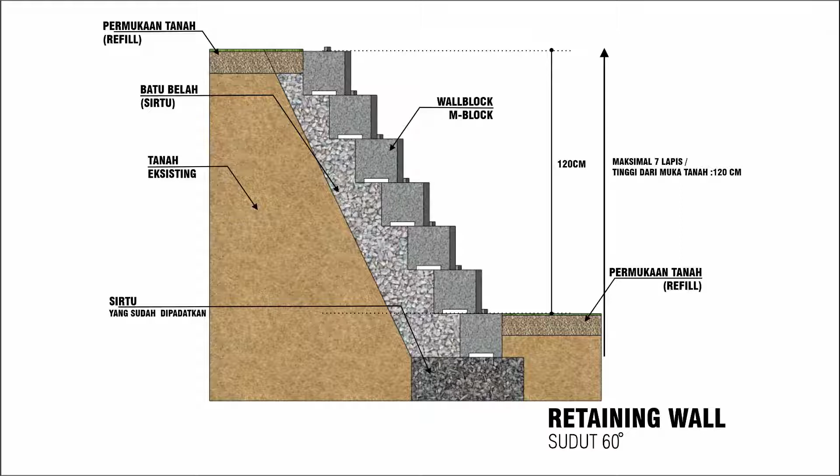In this video I'm going to show you how to build a retaining wall. I'm going to show you how to go from this to something that looks like this, what you see directly behind me here. Alright, let's go ahead and get started.

Alright, so the first stage in building a retaining wall is to design and plan the wall. What I have right here is a diagram of the side of the wall if you're going to build a 3-foot retaining wall like I'm going to show you how to do in this video. Depending on the height of your wall, your design is going to vary a little bit, but this is basically the fundamental elements of most retaining walls.

So first off, you have a 6-inch layer of packed gravel base. That's like a type 2 gravel, the same stuff you'd use underneath a paver patio to make sure it stays flat. This is going to be the foundation. This is what's going to keep the blocks in place and keep them from waving around and warping and keep your wall from pushing over. So extremely important. You don't want to skimp here because that's the structure of your wall.

So you've got a 6-inch gravel base, and then you've got the blocks. This type of block has a little bit of a lip here, and that's the type of block that I recommend. They're really widely available, they're easy to use, and they're pretty cheap.

Then behind the blocks you have a 6-inch layer of gravel for drainage. That's like a rough 3/4 inch rock. You can ask your local rock yard, wherever you're going to get the gravel base and the drain gravel from, what they recommend for cheap drain gravel for behind a retaining wall. It's usually going to be about a 3/4 inch rough rock that you put back there.

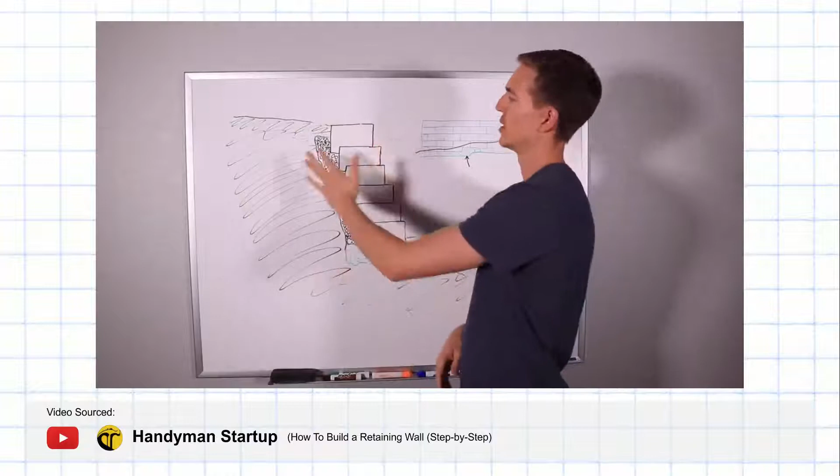And that's important because when it rains and all this dirt soaks up a bunch of moisture, it needs somewhere for that water to go. It's already under a tremendous amount of pressure just from the dirt. So we get all that water in there, it gives us even more pressure, and then it's going to push our wall over. So we need a place for that water to go, so it can go down through these rocks and out the front of the wall.

Now in some cases, you're also going to need a drain pipe down at the bottom here if you have a really tall wall or your paver blocks don't allow for water to go out the front. So basically check with your block supplier and they'll give you recommendations on this. It's a very excellent resource to help you through this project, so make sure to utilize that.

And then up here at the top we have our topsoil covering over our gravel, so we can plant grass or plants or whatever on top of that. And then back here, this is all packed dirt. As you build the wall, you're going to want to pack it down and tamp it down to make sure it stays in place and doesn't sink down and your wall doesn't start caving in backwards. You don't want that.

And then in the front, you need to cover half of the bottom block. This is your ground level right here, and that needs to go up to at least half of the bottom block. This is a 6-inch tall block, and this is a 6-inch paver base. We're going halfway up the block, so we need to dig the hole at least 9 inches deep for this wall to be structurally sound so it doesn't move forward. Wherever the ground level is going to be once you install your wall, you're going to have to dig at least 9 inches deeper than that if you're going with the same system I'm showing you here.

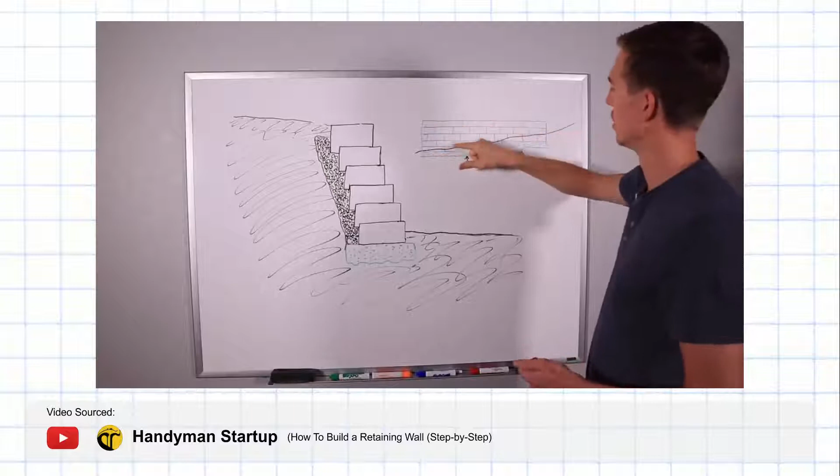Now over here on the right, I have the front view of a wall if you're building a wall up a hill. Now you might have the question of, well, what do I do if I'm going up a slight grade? Should I just angle the blocks and go up at an angle like that?

And the answer is definitely no. You need to have a perfectly level block. That's very important for the structural soundness of the wall. It needs to be structurally sound. So what you'll do instead is you're just going to step it up. You can just step it up so you don't have to dig 4 feet deep over here. You can still just dig down the 9 or 12 inches or wherever you're going and then just step up the bottom as you go and make sure it's just really packed and level, and that's the most important thing.

Alright, so let's talk about a few things you're going to want to consider when you're designing your wall. The first thing is going to be the maximum height. At the tallest point of your wall, how tall is it going to be? That's important because it's going to determine the design here. It's going to determine what size blocks you're going to use, what kind of drainage you need, and the thickness of the base that you need to install. So you're going to want to consider that height.

Secondly, you're going to want to consider, again, what kind of blocks you're going to use. There's all kinds of different blocks. These are the ones I like just because they're really simple and they're cheap and they look really good still.

And then you also want to consider the dirt. You're going to be moving a lot of dirt, so you're going to want to think through where that dirt is going to come from. You're going to have to dig down 9 inches deep here, and you're going to have to do something with that dirt. Where are you going to put it? Are you going to put it back up on the top of the wall? Do you need to bring in more dirt to put up on top of the wall? So you really want to think through that and plan it and kind of eyeball it if you can, or actually do some calculations if you have the time, because the last thing you're going to want to do is move more dirt than necessary.

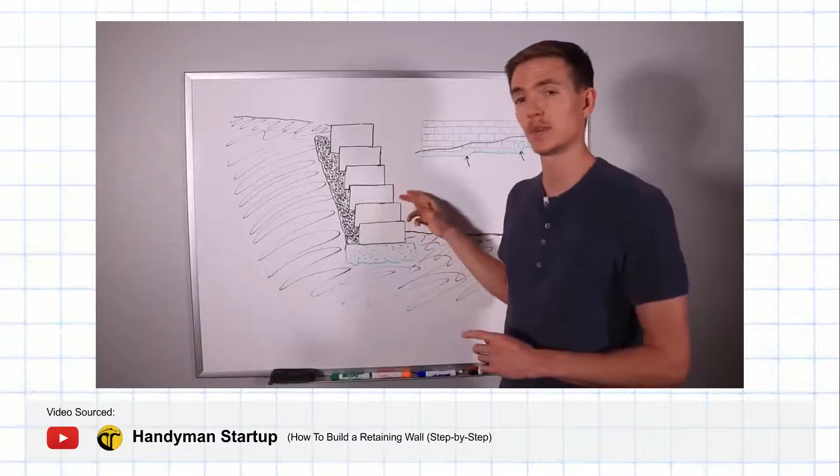And the last thing you want to consider is make sure to check your local codes, so you build your wall to code, because you're not going to want to have to redo this. And lastly, your utilities. Make sure there's no utility lines running under here that you're going to hit when you're digging, and make sure to call before you dig. And once you've got it all planned out, you can go ahead and start digging.

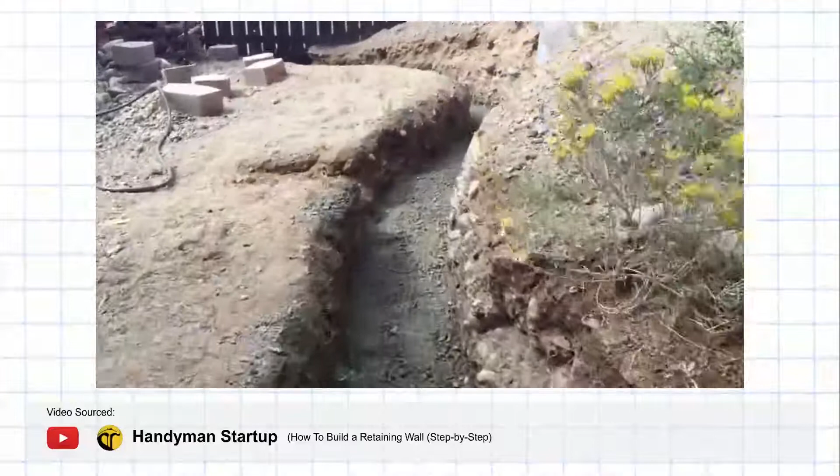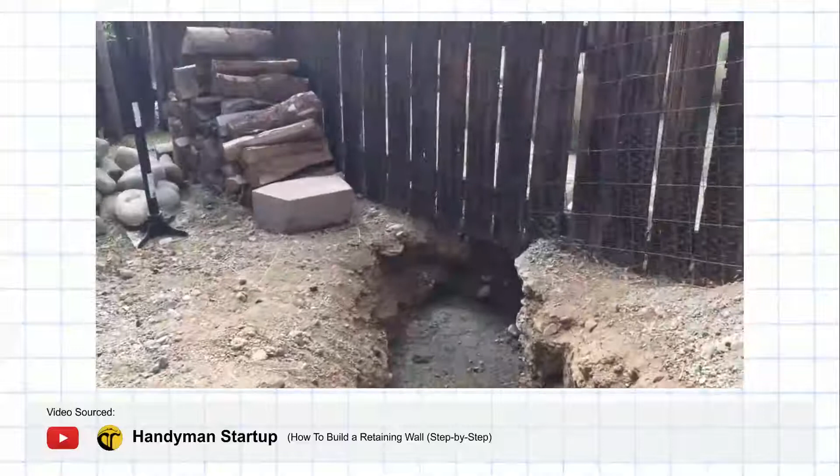Now, I'm not going to show you how to dig because that would be boring and you already know how to do that. But here's a quick look at what your trench might look like when it's finished. You want to aim for a really level trench. You want to make sure it's level before you add the gravel base. This is going to take a lot of work. This is probably the majority of the work, especially if you have rocky soil like I do here.

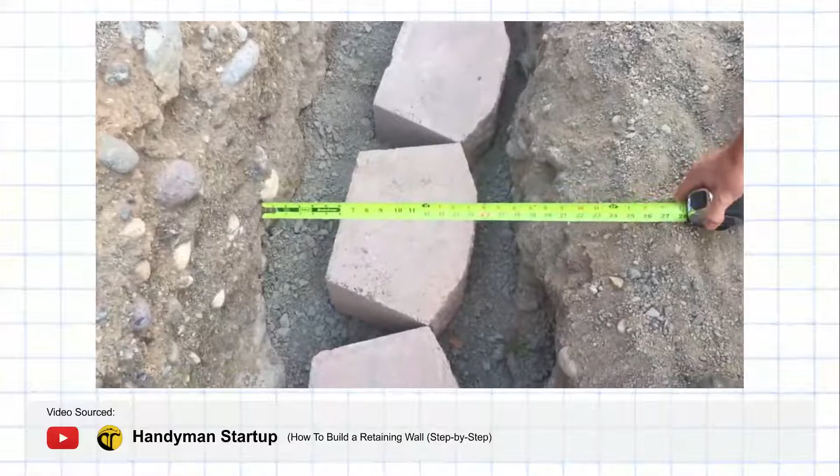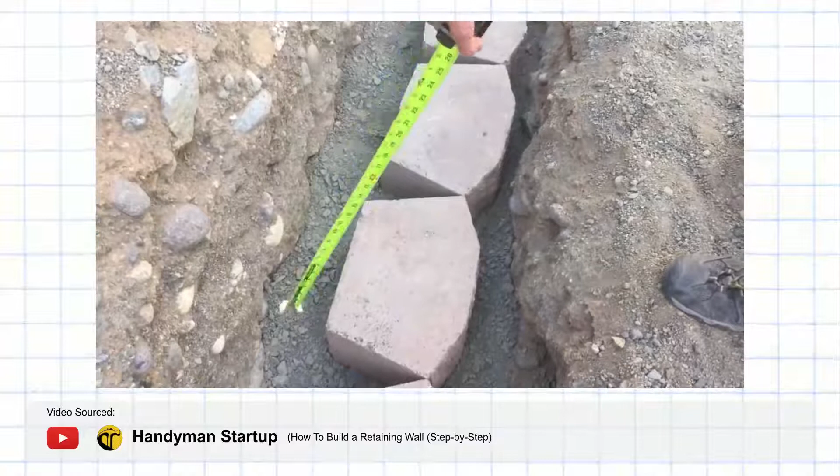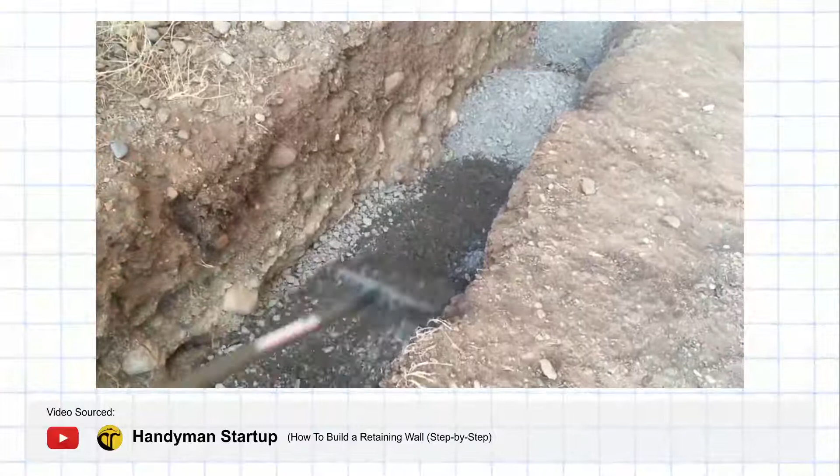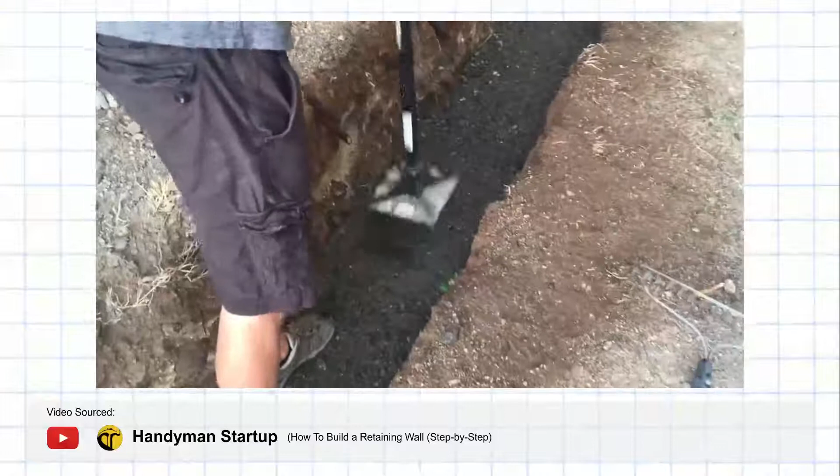And once you've dug your trench, the next step is to add the gravel base. You're going to want to do this in 2-inch layers. So add about 2 inches, dump consistent piles and then rake it out into about a 2-inch layer, and then tamp each layer really well. You really want to pack it down. And if you need some extra moisture, if it dries out, go ahead and get out a hose and get it slightly damp to help it pack down a little bit better.

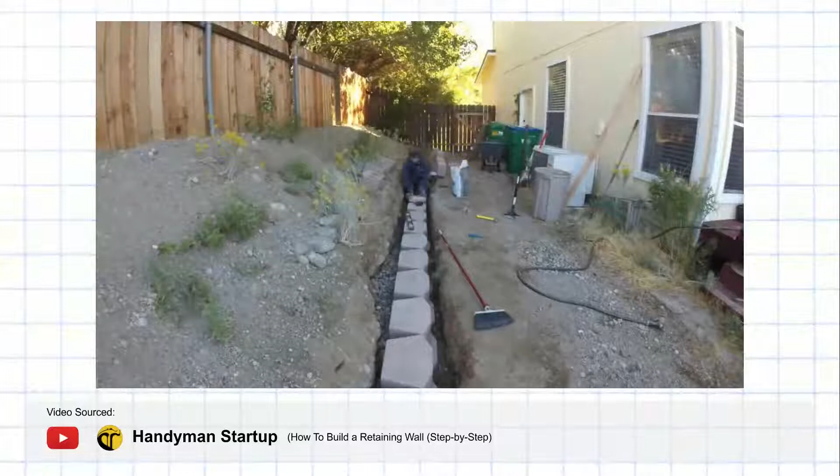And once you've built up 6 inches of gravel base, go ahead and level it out really well and then tamp it down one last time to prepare for your first level of blocks. And finally, you can start on the first layer of retaining wall blocks and start actually building your wall.

So start at one side and just work your way down one block at a time, leveling each one as you go. So the first layer that you're going to lay down of these pavers, or these retaining wall blocks, is going to be the most time consuming, kind of frustrating because you're bending over, trying to get it perfectly level. And here's a couple quick tips to make it a little easier.

First off, you want to make sure your type 2 gravel base is really flat to begin with, so you have a good start to work with from the very beginning. But then, as you're laying the blocks, you'll find that there's just slight modifications or adjustments you're going to want to make.

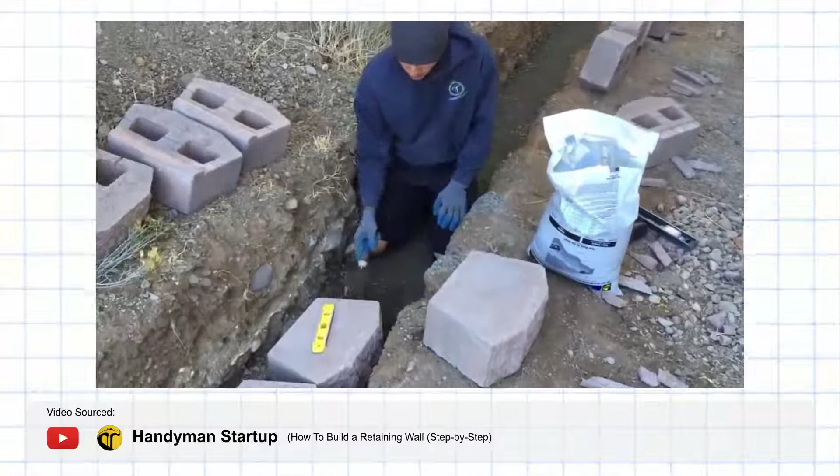And what you'll do is, maybe you put your level on it and you see it's a little out of level there. So you take your block back up and just take some sand, and just spread that out wherever you want it to add some or even it out. And this is much easier to work with than trying to make some minor adjustments with the actual type 2 base.

And again, this first layer is going to take the most time because you have to level each individual block. The rest of the layers, you can just lay the blocks right on top of the previous block, no worries. But this first one is really important that you get each block level, because you're not going to be able to level it later as you add rows.

And once you've leveled all the blocks, you can start adding some gravel. So if you remember from earlier in the video, I mentioned that you're going to want to use a 3/4 inch gravel for drainage to go behind the pavers. So you're going to want to go ahead and add that behind the pavers, and then tamp that down. I've decided to use a 2x4 just because I had one and my hand tamper was a little bit too big to fit behind the blocks, at least on the first few layers.

And then you're also going to want to add some dirt to the front of the blocks and also pack that down as well, just to keep the blocks in place as you build the rest of the wall. And once you finish the first layer, the rest of it, it's all downhill from here. You've hit the easy part, and now it's just a matter of stacking blocks up and then filling in the gravel and the dirt behind the wall.

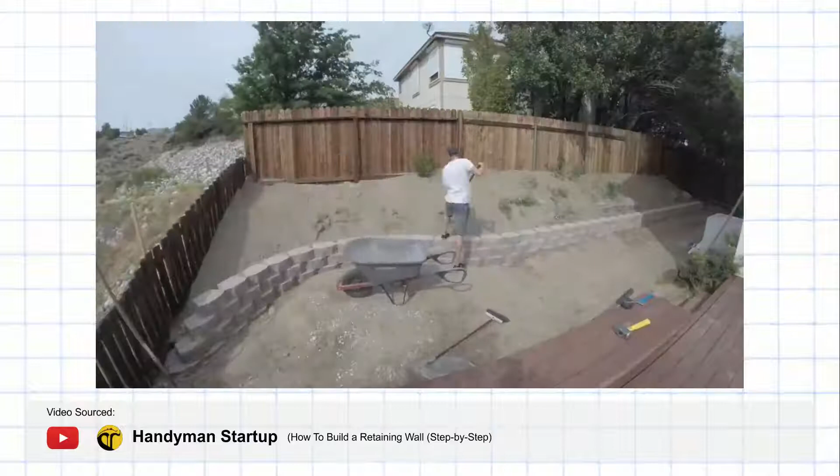So to start laying each individual layer, just put the blocks starting at one end, one by one, and make sure to stagger the seams, as you can see here in the video. And then again, you're going to want to backfill with the gravel and the dirt after each layer, and then tamp down the gravel and the dirt really well, just to pack that down behind the wall so the wall doesn't sink backwards over time once it's built, as the dirt settles.

And this wall that you see here, this is about a 50-foot long wall, and again, this is about 3 feet tall when it's done. And I really wouldn't recommend this project to do by yourself if you're on a tight timeline. Unless you have a few months to do this and you're going to be breaking up the work, a few hours here, a few hours there, I really wouldn't recommend this.

I mean, this project took me basically most of the summer plus some time, and I was just working a couple hours here, a couple hours there. Otherwise, there would have been way too much labor, and I would have had to hire some heavy machinery, or I would have had to hire some labor to help me do this project. I would never recommend doing this by yourself on a tight timeline.

And the total cost of this project, again, this is a 50-foot wall, about 3 feet tall, was just a little over $1,000. Okay, most of that money was in pavers, or the actual retaining wall blocks. That was about $900 of it, and then there was about $150 worth of gravel and the Type 2 base, again, which is really cheap. If you go to your local rock yard, you can even have that delivered.

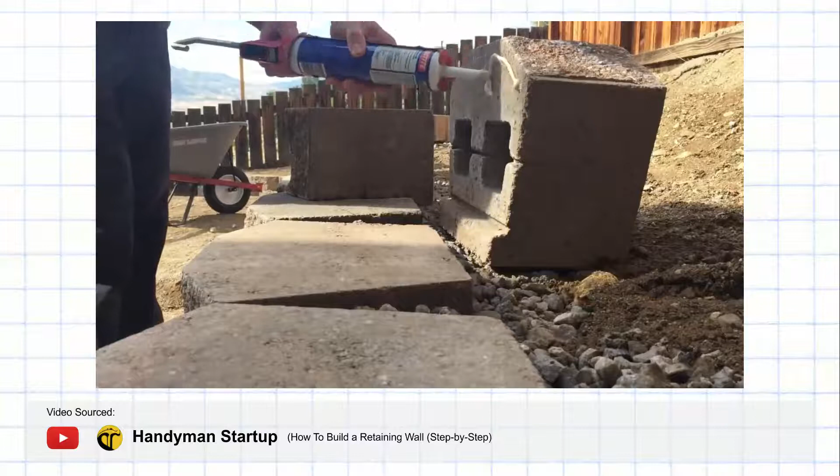And for the top layer, you're going to want to actually glue it down to hold it in place so somebody doesn't come by and just tear it off the wall, and you got to do a bunch of digging and stuff. So go ahead and glue the top layer, and you can even glue the top 2 layers if you want extra security, or if you're using a smaller block.

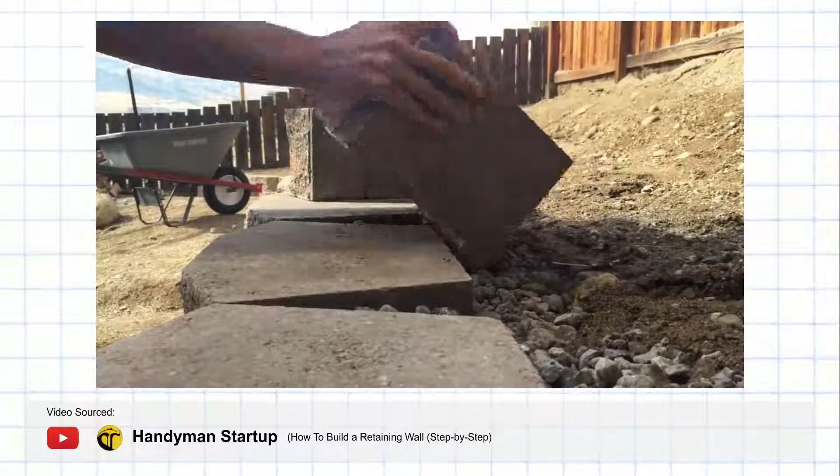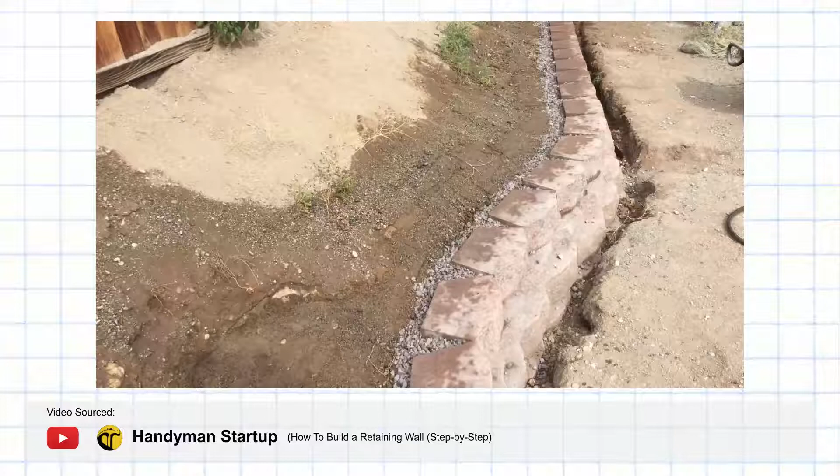So here's a quick look at what the wall looks like after the first few rows. You can actually see the gravel and the packed dirt behind it. I've actually tamped that down really well. And then here's what it looks like on the last layer. Okay, I put some topsoil over that gravel so you don't see the gravel. But I actually don't tamp this layer down. I don't want to pack this soil because I'm actually going to be planting stuff here.

So I hope you've enjoyed this video so far, and I have a couple more bonus tips to share, so don't go anywhere. So at this point, you might be wondering, what if I need to cut a block? And cutting a block is actually pretty easy. I'm going to demonstrate exactly how to do it right here.

Now first, you need to grab a mini sledgehammer and a mason's chisel. And what you're going to do is you're just going to draw a line where you want to cut the paver, and then you're just going to go along that line, tapping the chisel, and basically you're going to score the block all the way around, and just keep tapping it and keep working that groove. And eventually, once you've worked your way all the way around it, you can hit it a little bit harder a couple of times, and the block should split right down in a perfect line for you.

You might have to chip off a couple of chunks here and there, but that's the easiest way to cut it. Now, obviously, another way to do it would be to get an angle grinder with a diamond blade on it and cut it with that. And that would probably be a little bit faster if you're cutting a lot, but typically you're only going to need to cut a couple of them, so it's really not a big deal. And that's exactly how you do it.